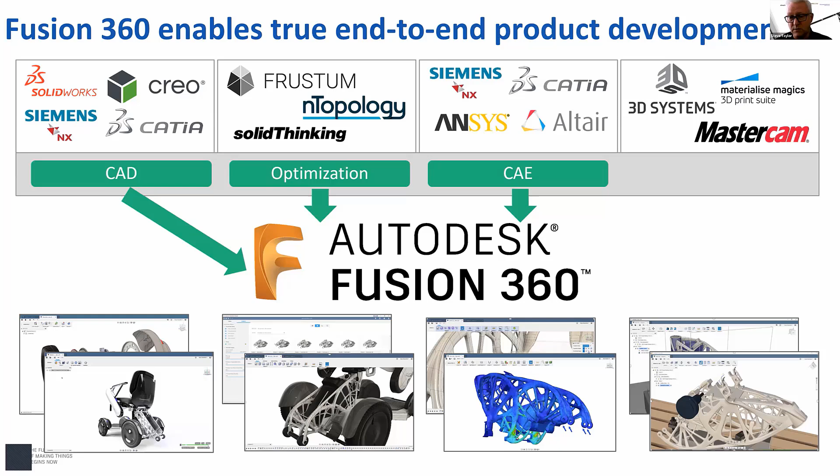With things now within Fusion, we've got generative design. We're actually able to let an AI in the cloud run iterations on a part, given what materials are available, what manufacturing is available, and what stresses and forces the part will be subjected to. The AI will come up with designs for you.

And finally, you've got the ability to see whether it is manufacturable without having to export it into a third-party software, test it, and say 'oh, actually, we can't machine that,' and then bring it back into the design. So that's all within one platform.

And even more, this is semi-cloud-based. So even though you're working on the software on your computer, you're able to save all your data in the cloud securely. That makes it better for data management and for collaboration, as you can have multiple users invited to projects to collaborate, comment, and work with the designs collaboratively - and it doesn't matter where you are.

Another beautiful thing about it is that you're able to view your designs on your smartphone, on your iPhone, on your iPad. If you're an educator or in education, you've even got the ability to have a fully cloud-based version, or access to a virtual server, meaning you can use Fusion completely in the cloud - whether you've got a Chromebook or an iPad, you've got the full capability of doing that.

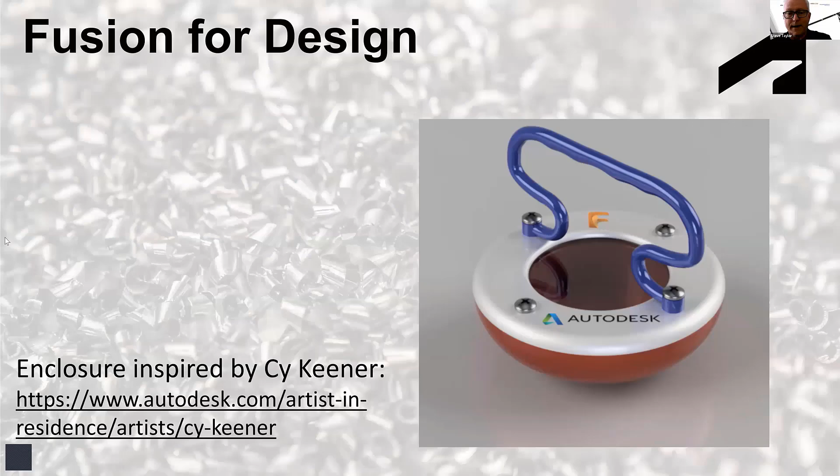So let's have a look at Fusion in practice. One of the things I want to do first is look at the design side of it - how quickly can we iterate and design in Fusion? Rather than doing a PowerPoint, I find sometimes the easiest thing to do is just jump straight into the software. So this is Fusion itself.

Up on the top left-hand side, we've got 9 little dots - sorry, the show data panel. If I open up that data panel, this gives me access to my cloud library. If you're used to using cloud, whether through Windows, Microsoft Cloud, or Google Cloud, it's very similar with the Autodesk Fusion Cloud. All your files, all these particular products are up in the cloud, and you have access to them wherever you may be in the world.

You can easily create projects. So I open up a project and I call this 'knowledge point.'

Call it 2 - you've already got one called 1. That creates a webinar or project in alphabetical order, which I can pin to the top, allowing me to have quick access to any of my particular projects that I'm currently working on.

When I go into it, I'm now able to create folders and file structures, and upload files. It does have one-tab uploading - if you upload a CAD file from another company created on different software, Fusion will try to create a Fusion file from that straight away. So when you open it up, it will be a native Fusion file. It's called AnyCAD.

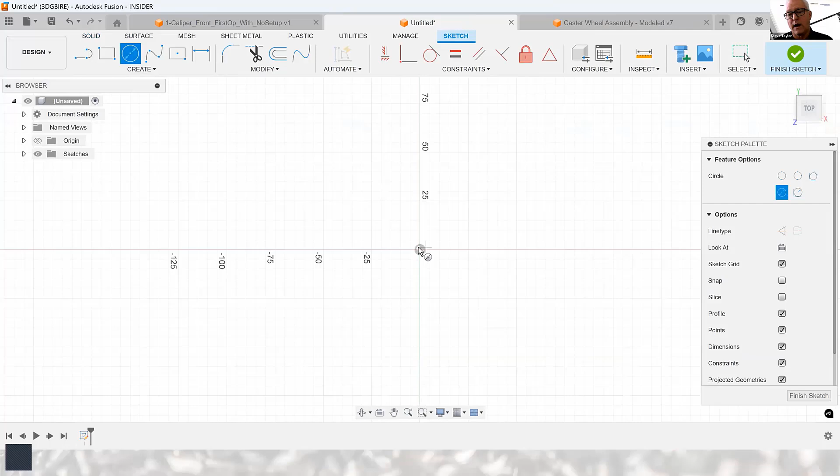I get separate sketch tools that I can create, and I can provide certain sizes for the diameter of the sketch I'm producing. Once I've created my 2D sketch, I can go back into a 3D environment and very quickly extrude that to a certain thickness that I want.

As default, my material is set to steel. If this is the lens I'm creating for the top of my enclosure, I can very quickly just change the actual physical material of this part. This also works for when we're looking at stress calculations. All I have to do is drag and drop, and it converts the actual material for this part to whichever material I've dragged onto it.

If I close that now, all I'm going to do is just save this - I may as well keep it in the Knowledge Point Webinar 1 folder, and I'll call this lens.

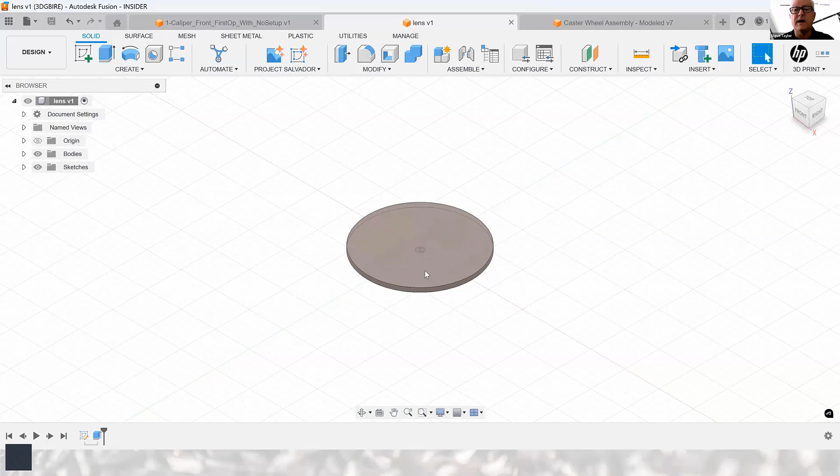That's just a simple process for creating an individual part. If I wanted to actually create an assembly, I don't have to do anything different from what I've just done. If I start a new design, I can have multiple designs open simultaneously. First of all, I'm going to create a component - the base part of my assembly.

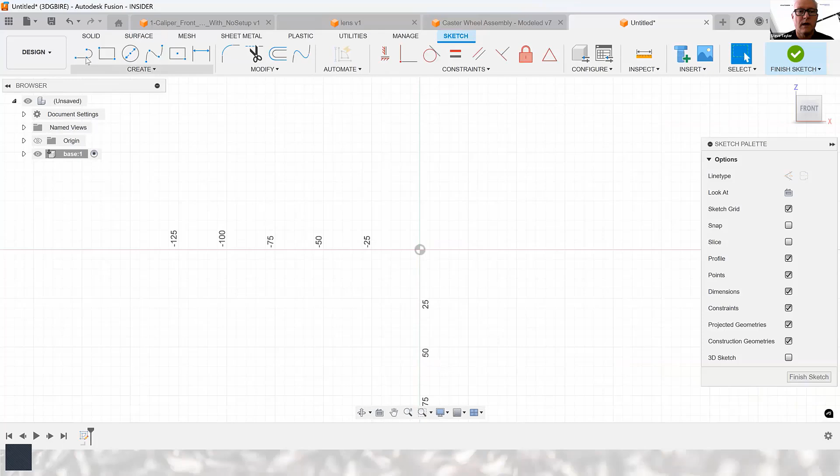I'm going to sketch on this side here, and roughly position the size of the profile I want to produce. I can use dimensions to actually fine tune the sizes of this.

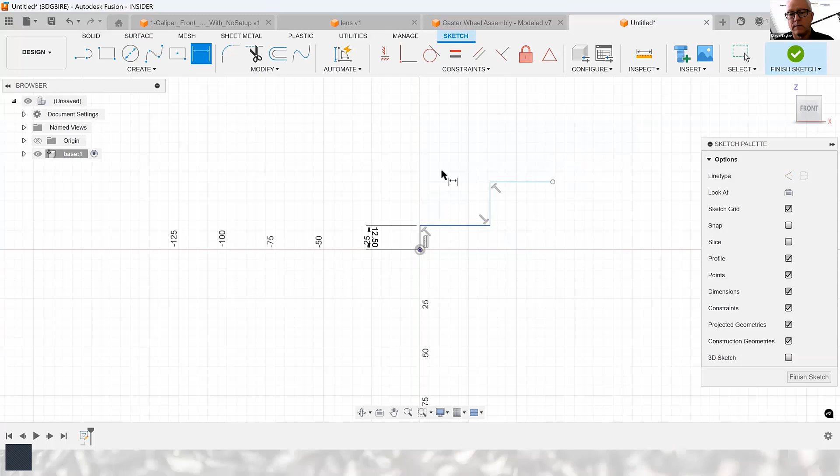Make that 32, make that 35 to the top. You can see I'm very quickly just adding dimensions, and I'm doing it pretty quickly because I'm conscious of the time we have for this particular webinar.

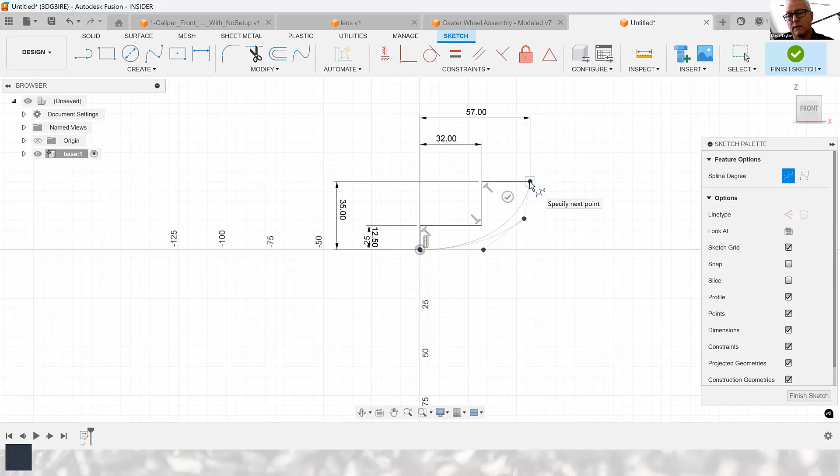And then in the spline tool, I'm going to do a control point spline, which will allow me to very quickly create a spline. With this particular type, the actual shape of the object is controlled by where these points reside.

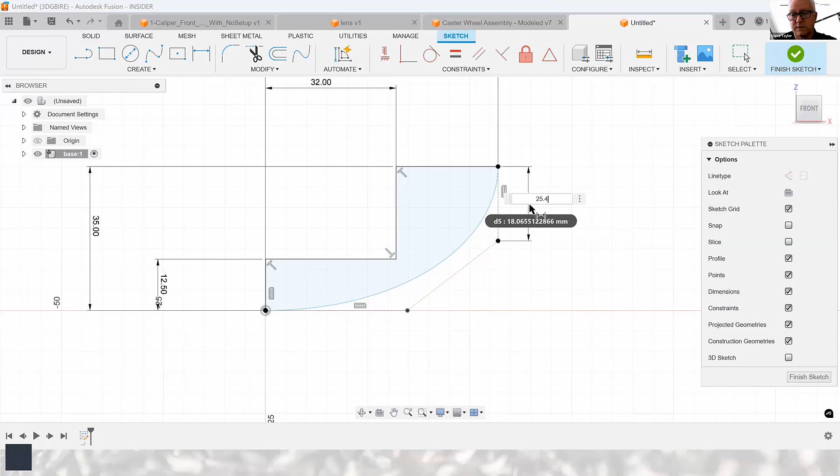So what I'm going to do is just fine tune from here - fine tune so that's horizontal, that's vertical - and then by giving a couple of dimensions here, got that at 25.4, and also make that exactly the same as that one. So again, parametrically driven sizes to produce these for us.

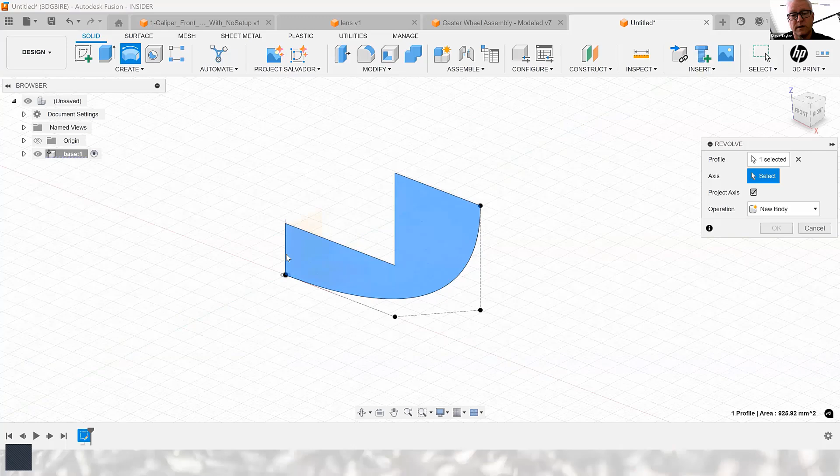Once I've finished that particular sketch, I can then revolve that round, selecting the center line, or the axis that I'm going to be revolving it around, which in this instance will be this line here, and I can create a body.

If I want to put some holes in, very quickly, I can sketch on the top here. I can place a point where I want a hole, much like you might do a center pot when actually drilling a hole. I can very quickly make sure that point is aligned to the center, and then using dimension, I can very quickly put a dimension in here, 44.5. Finish sketch. This then allows me to use the hole tool.

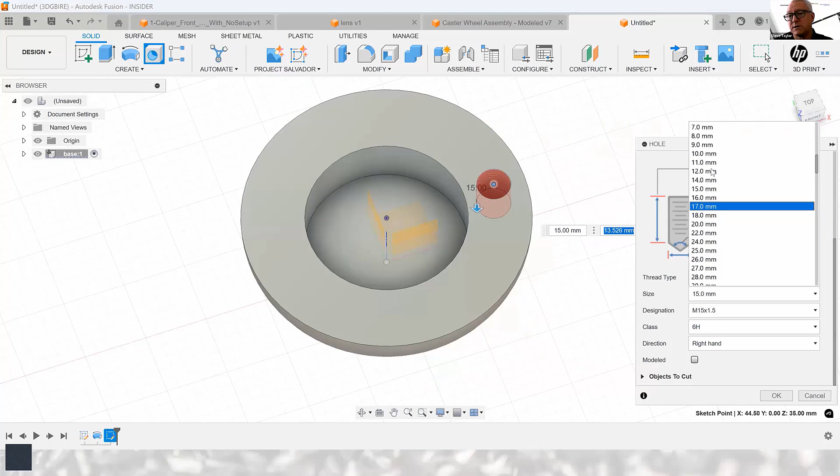And if I select that point now, I can very quickly specify a type of hole. I can make it threaded. So if I wanted, say, actually I want this to be a 5mm thread, maybe not bigger, let's make it 6 — change that to 6 there. I can give it a depth, let's get that 12. And it's just a simple hole that we're putting.

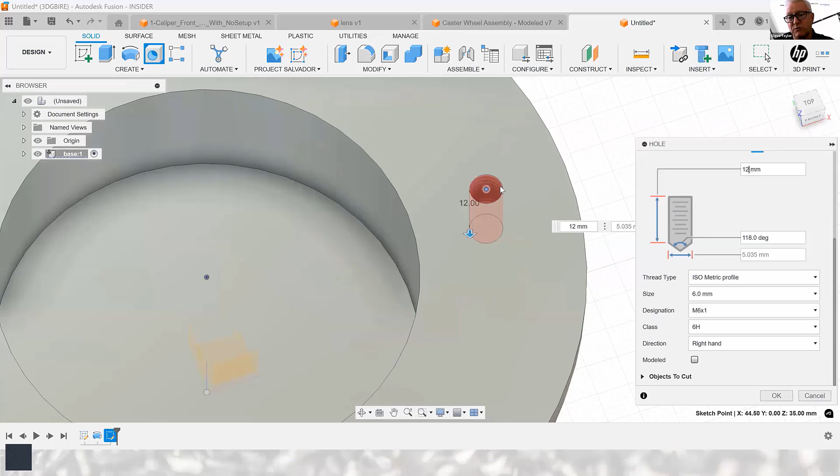Now, this is just a raster file, just a raster image. If I want to actually physically model it for 3D printing, I'll just put a little tick in this box here, this little box down here. And then what that will do is actually physically model the thread.

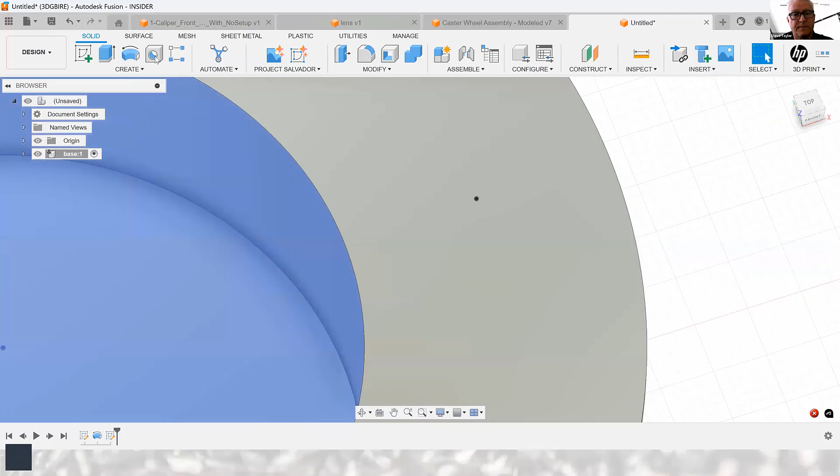Now, because I actually went into a zoom function then, it removed the selection point. If I go there, let's change that to tapped again. I said it was 6 mil, and let's put 12 mil on model. So that's now created that particular tapped hole.

I can use then a circular pattern to actually pick up on the timeline at the bottom that particular feature that I've just created, and then spin that around, saying that I want 4 of them.

Now with timeline modeling down here, if I want to do any changes — say I didn't want this to be an actual physical thread, but just an image — I can go back in and just remove that model, press OK, and it will automatically update moving forward. So this now is just a raster image rather than the physical model.

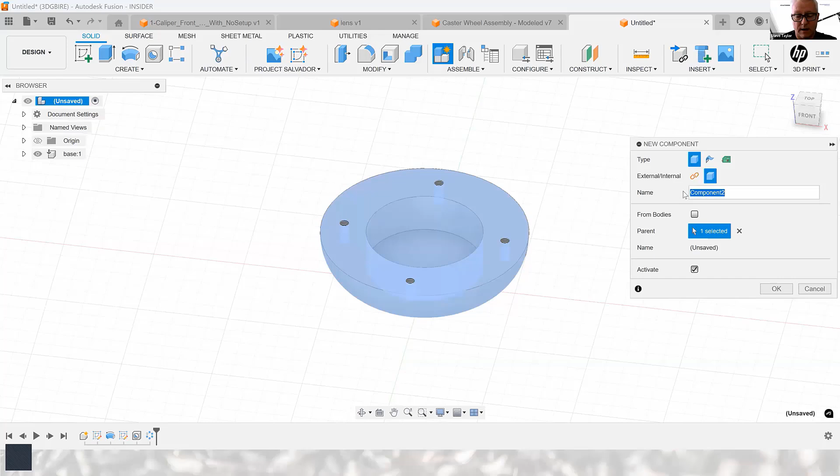With the base now completed, what we're able to do, in modeling or design terminology, is top-down assemblies, because I'm able to go back up to my top level, create a new component — this time I'll call it the lid — press OK. We now have a new component called lid in the browser on the left-hand side, and I'm able to sketch in place the lid where it needs to be.

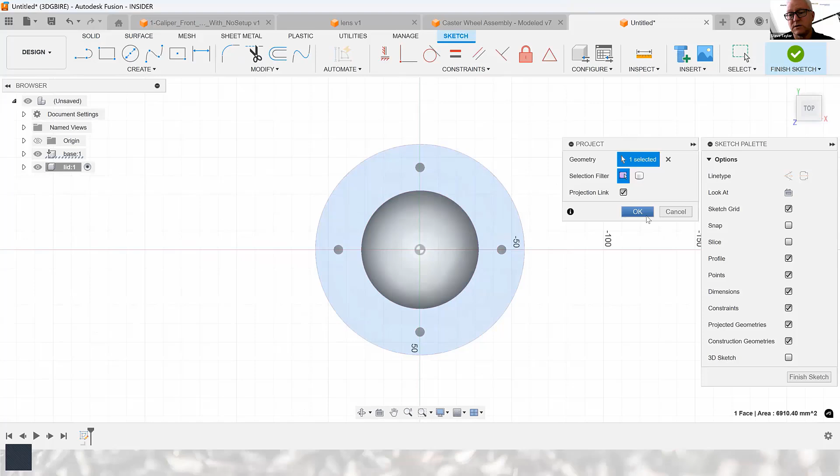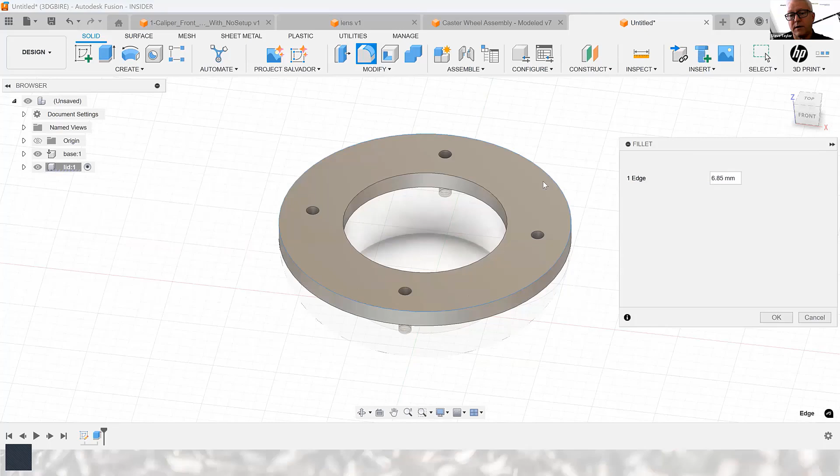If I now project through some of the information previously, it picks up on that. I can finish sketch, and I can actually extrude our lid upwards. If I call it 6.85 there, we've now got our lid in place. I can then come in, add a couple of fillets — put 6.85 on that one, and then add another one on the inside of 3 millimeters.

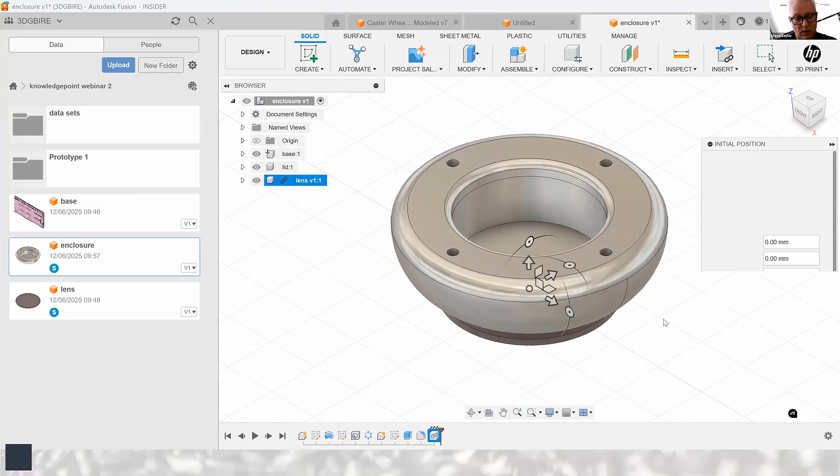So what I'm going to do very quickly here is bring in that lens that I created earlier. If I go to our data panel at the side, it'll open up. So we've got our enclosure that I've just created, and we have our lens that I created earlier. Now what I'm going to do is just drag and drop my lens into the environment here, and you'll notice it comes in at the bottom area — that's actually come in where I originally designed it, on those coordinates. I'm just going to pull that out and go OK. So that brings this lens in.

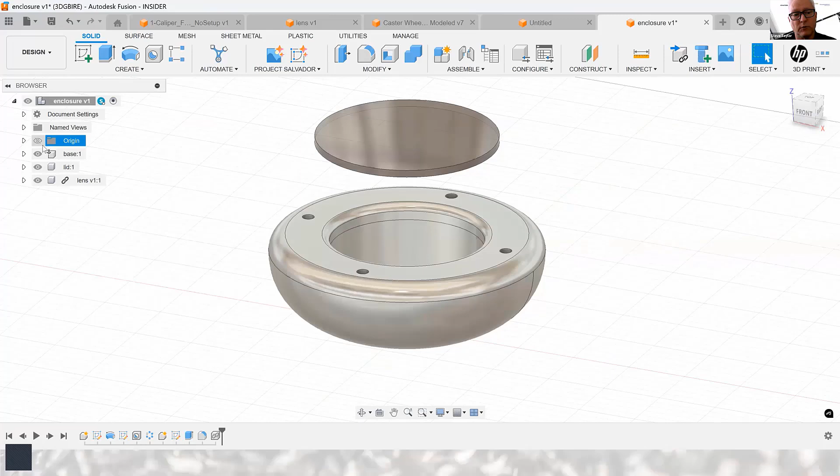And with all of the components that we've got here that we've modeled, we've got the ability to turn off the visibility of them and turn them back on again. So that means I'm now able to potentially start joining these together using what we call joints.

In Fusion, we have a number of different joint types - we've got as-built joint and joint. As-built joint allows you to join components where you've actually physically located them.

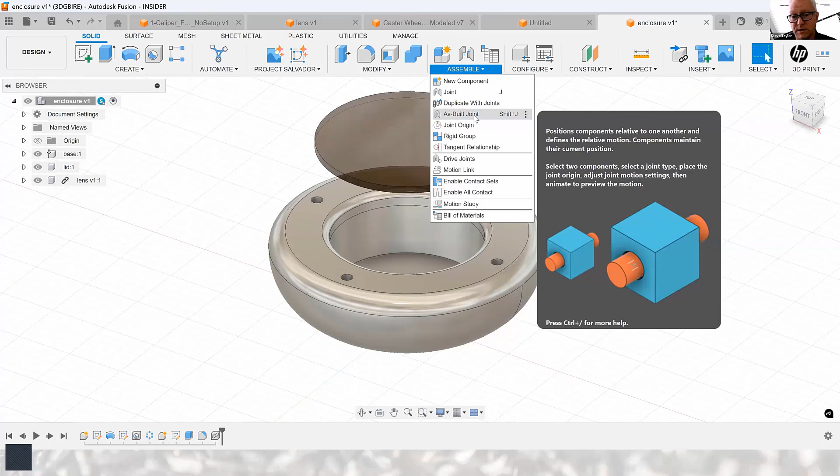Because I've created my lid in the correct position, if I do an as-built joint, select the lid and then select the base itself, I have the option of the type of joint. It will be rigid, but just to show you, if I go to Revolute and select the center, you'll see that it puts in this joint - it opens up a revolution joint. But I don't want that. For this, it's purely a rigid joint. Press OK, and that allows us to physically fix this in position.

If I hide the base, I can now use the joint tool to join the bottom of my lens into the bottom of my lid there.

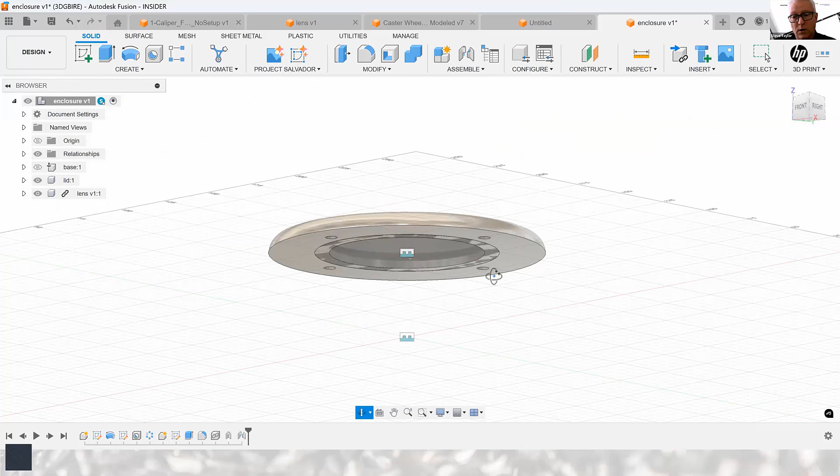You will notice that we've got interference. I can inspect parts, so I can say inspect these two for interference, and it shows me here that I've got areas of interference. Now that could be a problem.

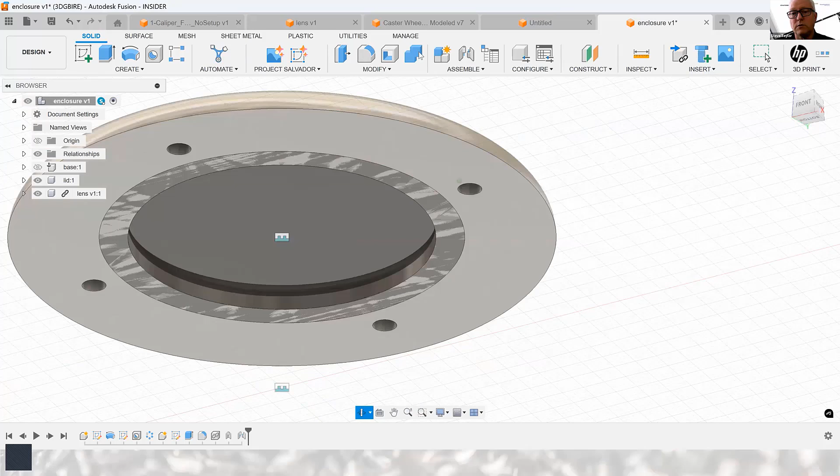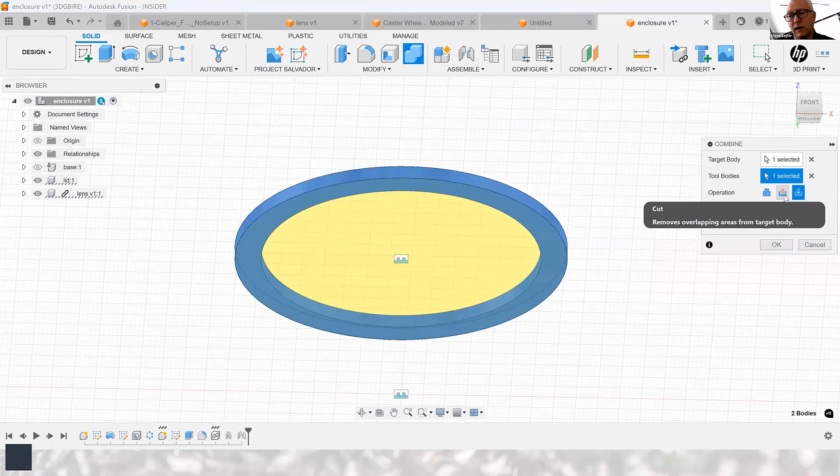However, in Fusion, it's not, because we can use this combine tool. What the combine tool does is allow me to select the target body to edit, which is this one. I can select a tool, and I've got options now - do I join them together, do I just do the intersection between the two, or do I actually use the glass to cut the lid? That's what I want. Press OK.

And now we've actually got a cutout where our lens was. And if we want to add just a little bit of clearance, I can press pull on here and just pull it outwards a little bit, to a quarter of a millimeter. Press OK, turn the lens back on again - that's now got its clearance, so it will fit.

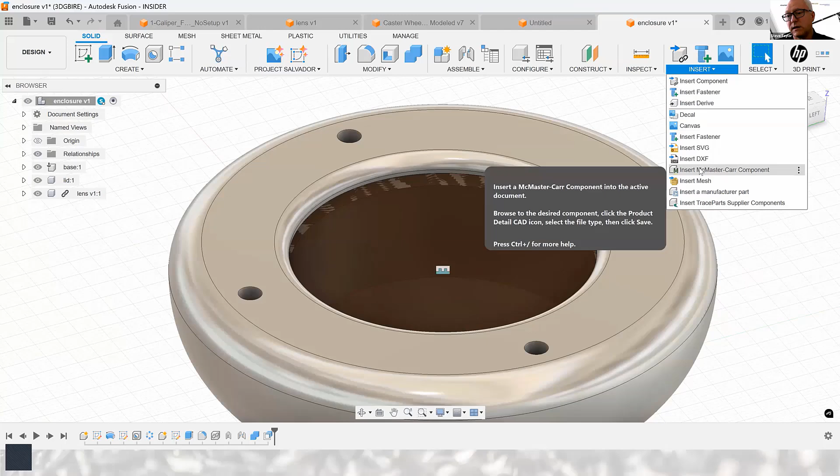That's the base there, and we've got our assembler. I can bring nuts and bolts in, so I can insert components from what we call a McMaster-Carr component catalog - I've got screws, nuts and bolts that I can bring in to use in these designs.

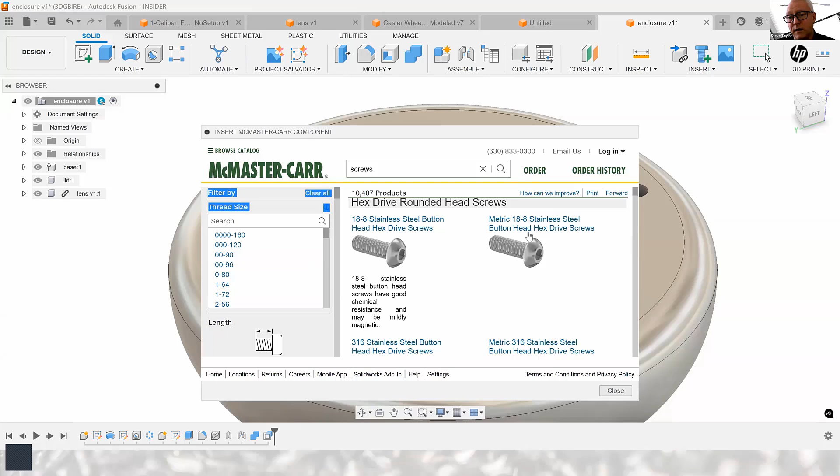I can search by various thread types. I can look for metric, I can look for round head screws here, I can find various metric options. Pick the one, and if I find one that I think will do, if I select the product, I can actually go straight in and download the step file for it.

If I download that... download, hopefully it exists in there. Try the sat file and download. That would actually download it, but for some reason that one was just not quick enough, so I might try a different stock component there. It's pretty small anyway.

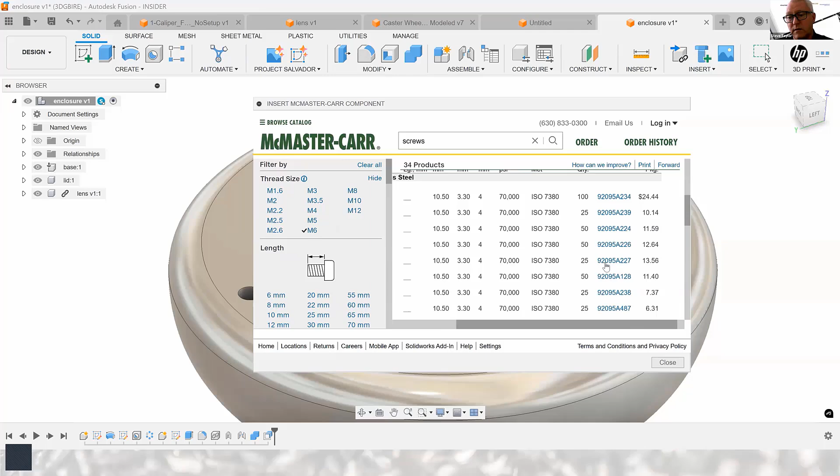I actually want an M6 - no, let's go M6, probably 14mm long, 16mm long. That one, step file, download. There we go - so that now brings in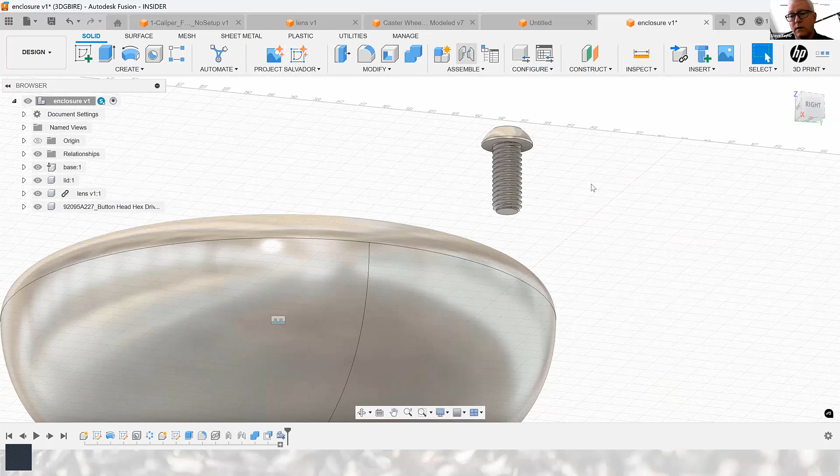a screw that I'm able to then join in the hole that I want.

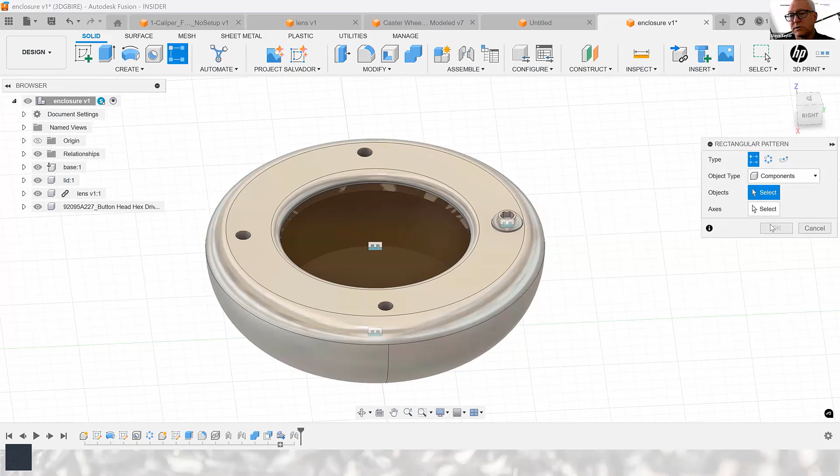Now, I can do the handle and then add more screws, but just to show you what you can do, if I do pattern of components, I select the component, which is the screw, I select the axis - anything on that axis there - and we want four of them. We want four, and we've got them in position.

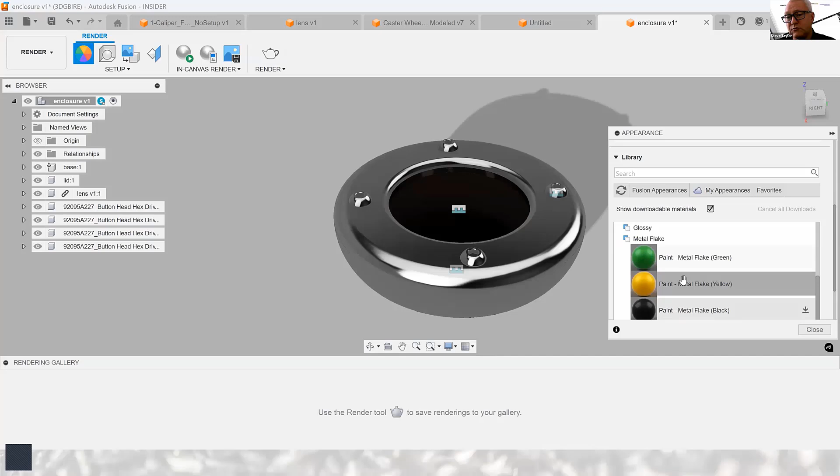Now I carry on with this, but what I'm going to do is go into the render. So if we want a good image of this, as you can see, it's in stainless at the moment. What I have the options to do is change the appearance - so if this is going to be potentially painted with metallic metal flake paint, I'm able to drag and drop onto various parts of metal paint.

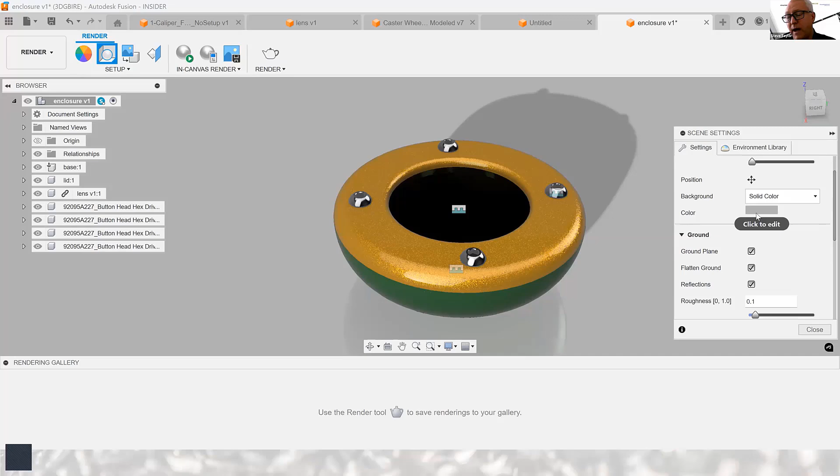I'm able to add or play with the scene settings, so I can increase the brightness of the actual scene that's being done. I can put a flat ground plane in, play with the reflections. I can change the background color or even the lighting - so I can just drop in this environment here and change the types of light, and just turn up the reflections.

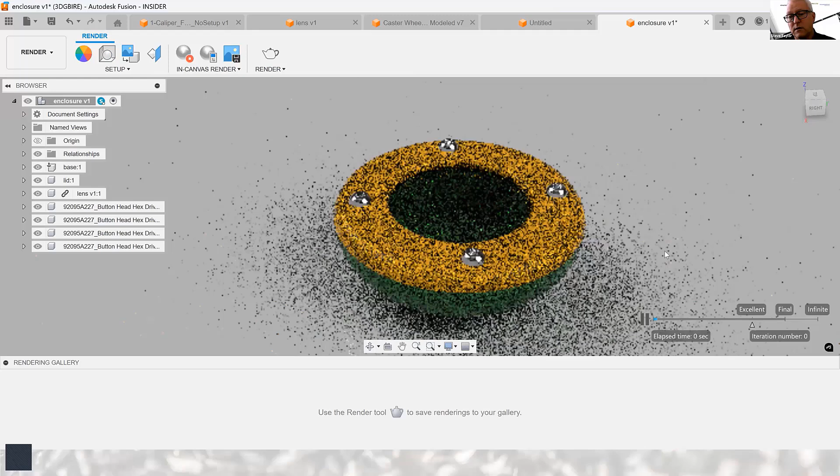Whilst I'm doing this, at any point in time, I can just run what we call an in-canvas render, which will give me an indication of the physical rendering that it might look like when it's actually done.

So, and I can zoom in and it'll start again. But this uses your computer's computational power, and you can't do anything else.

But with Fusion being semi-cloud based, what I can do, if I'm happy with this, I can go straight into render and do a cloud rendering. Click render, it will save the document, and I'm going to have a gallery appear. Now this is rendering in the cloud, which means I don't need to do anything else with it. I can come back in 5 minutes and I'll have a good rendered image.

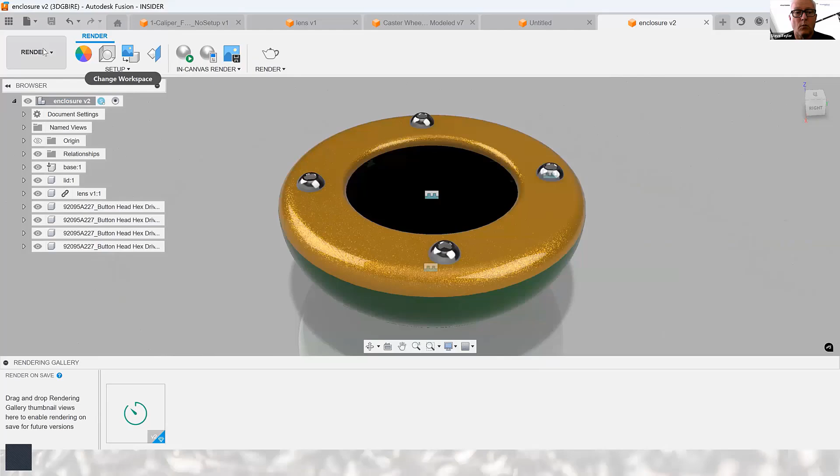What I can also do from this is an animation. So if I've got a big animation, or I want to animate and show people how this all fits together, this is the animation side of Fusion. We have a timeline at the bottom. Currently, the initial timeline is set to 1 second, and we've got a camera operation.

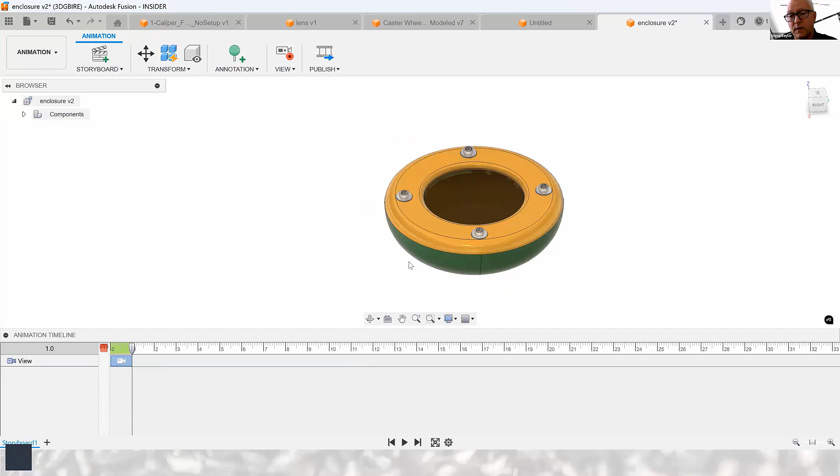So as I'm zooming here, it creates this. Let me drag the slider back. It creates that animation there. If I then change this to maybe 8 seconds, and I move this down and zoom out a little bit, I can also transform my components.

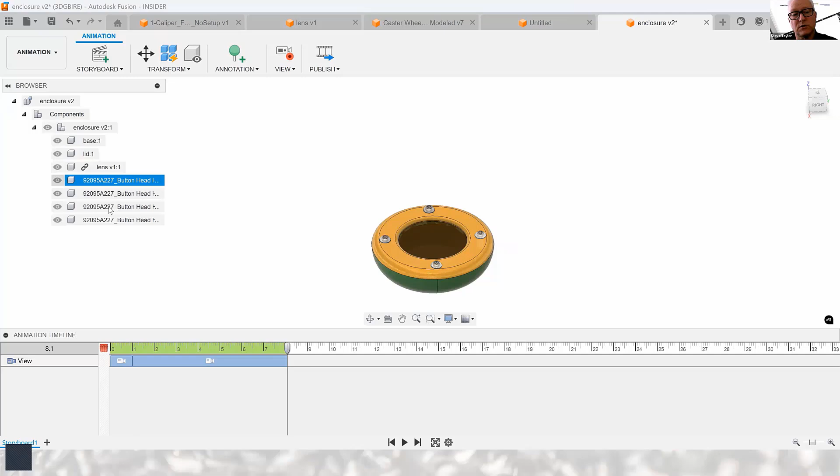So I can come in, I can go straight to each individual component here and move each of the components, potentially with a visibility trail, and move them all out. Now this visibility trail - very quickly I can create quite a complex animation on this.

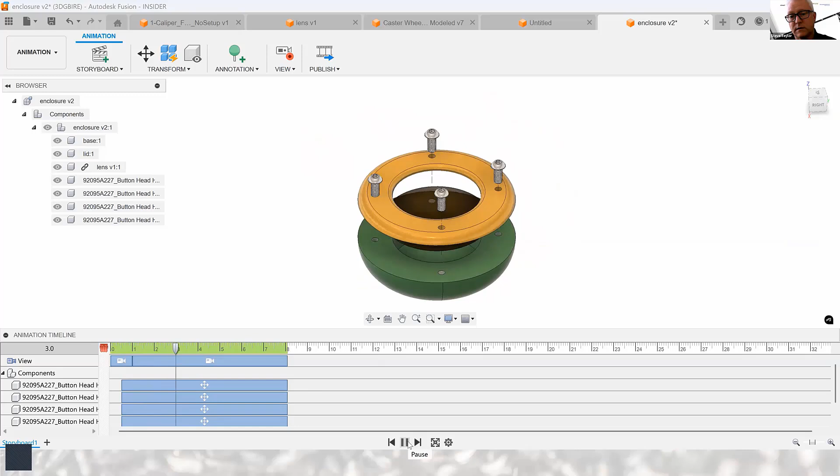Select the lid, move that up, select the base, move that down. Press OK on that. If I then drag this timer back, I very quickly created an animation of everything coming together. And each one of the movements I can modify and change.

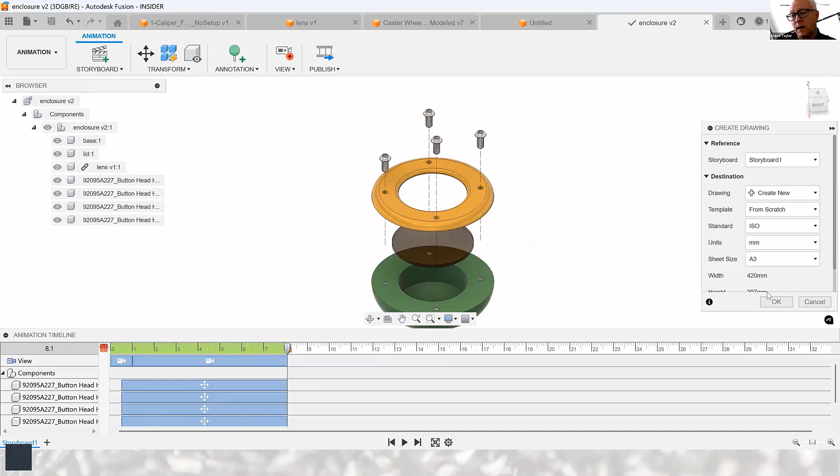What we're also able to do from that is create drawings, either from that original design or from the animation. If I do it from the animation, I'm just going to set it up as default. It auto selects the default size of sheet based on the actual design and the size of the drawing that we've created.

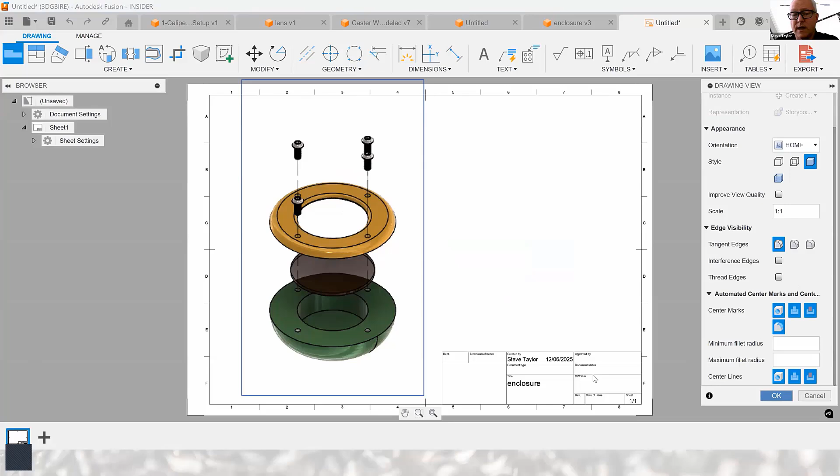And it creates an untitled sheet for us here. I can then drop in my base view. I can say if I want to have edges showing and center marks, center lines for everything, I can put all them on. Press OK. That creates that drawing for me.

And then straight away I can drag in a table, drop it onto the actual drawing, and it will automatically balloon it up. I could even bring in a base view of the actual assembly here, and from that I can potentially then just project other views.

Maybe I want that down to the bottom there. Do the side one here, open that, tick that, and I can just drag these up, and I can even add dimensions on. So again, very quickly I can create multiple drawings simultaneously within one environment.

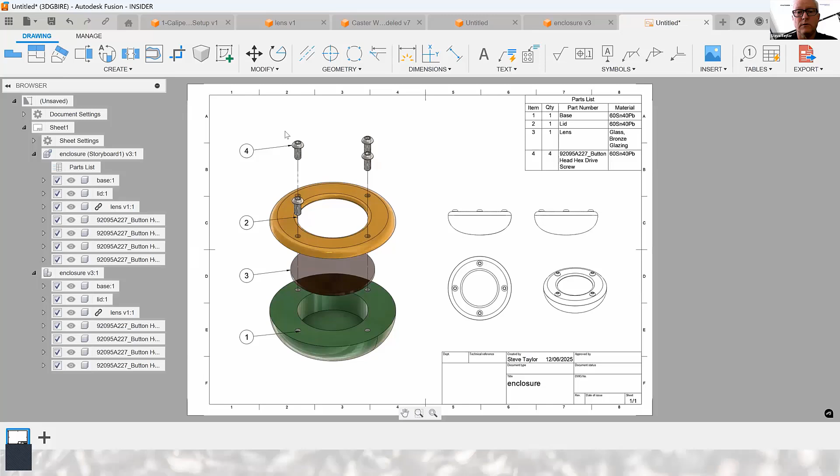So that's very much a quick overview of the CAD side. What we've also got in Fusion is a CAM side, so we're able to very quickly run CAM profiles through our design. Again, just quickly going back into Fusion, I've loaded up this particular part here.

And all I'm going to do is just demonstrate very quickly. You can see within the manufacturing environments we've got milling, turning, additive, inspection and fabrication possibilities. I'm just going to stick with milling in this. We have 2D capabilities, 3D capabilities, and multi-axis, so we can do up to 5-axis manufacturing.

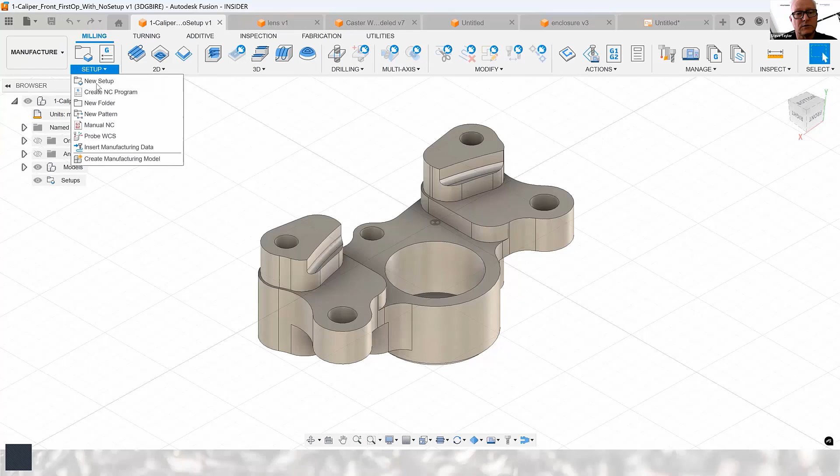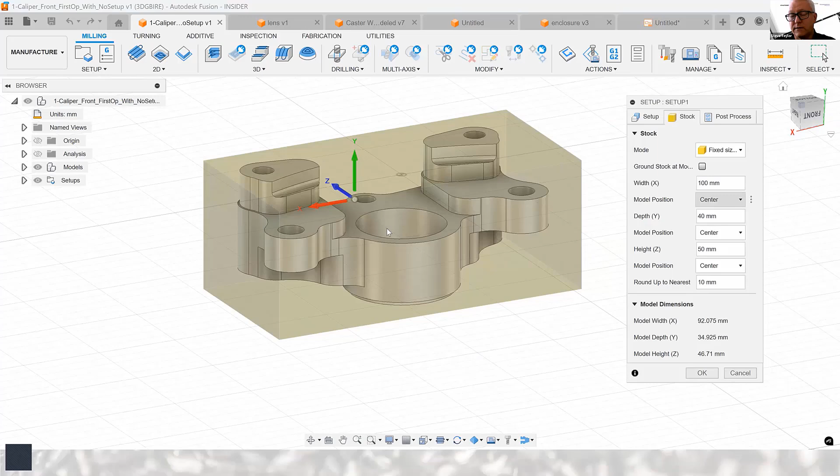Just going to create a new setup. From this, as default, it comes up with a default relative size block, which you can actually change. So if I said that it is a fixed size block, it'll change to a fixed size. I can then position where I want my model within the block.

So looking at this now, I'm just going to round it down there, and I'm going to change these sizes now. So I'm going to pick a size of stock that I can potentially get off the shelf here, and the Z height there, that's about 50. But rather than having the model being central from a height perspective, I can actually offset it just from the top, maybe 0.5 millimeter there.

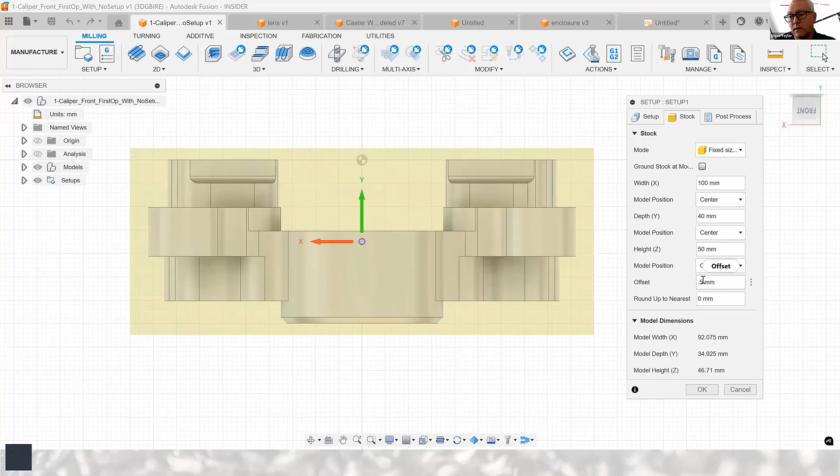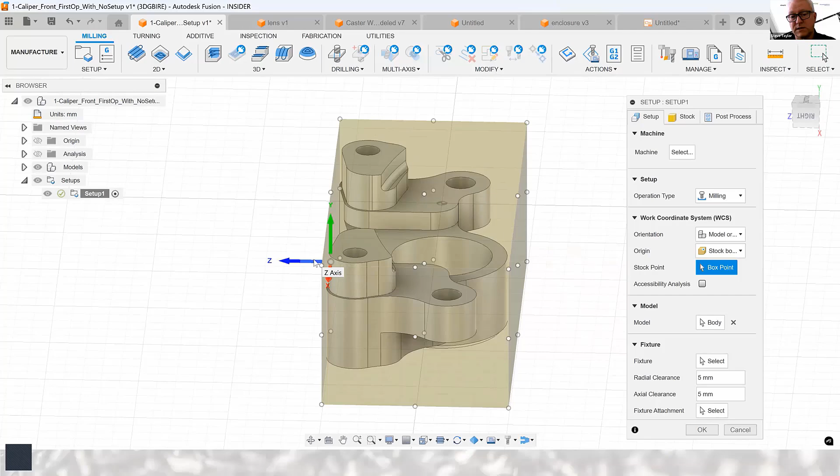So what that does is offset from the top by 0.5 millimeter, which brings that down in there. Now I can also position exactly where my Z-axis is. So currently my milling machine's Z-axis is going up - if I pick the stem of that and that face, it will position it this way. Because I've now relocated this, I just need to change the center of the stock in the X, Y, and Z. Let's change that now - that's perfect.

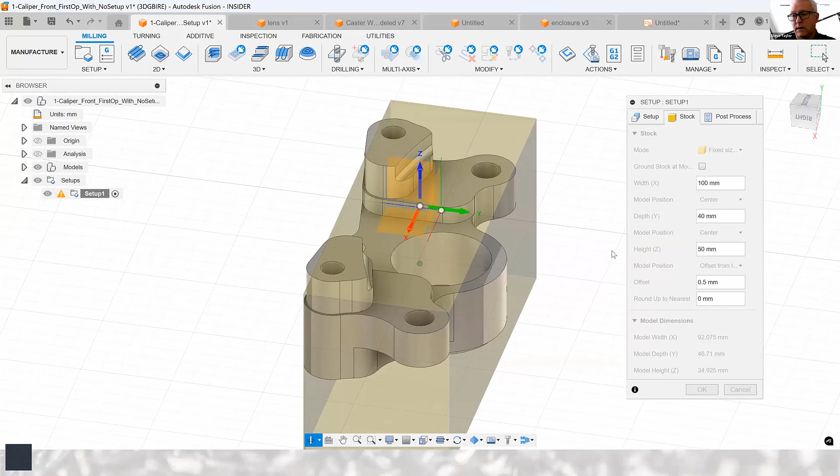I just need potentially to make it wider in my Y, so let's make that 50. Height wise, I can probably get 2 millimeters on there, so let's say I'm down to 45 - even 40, I think I might get a little bit of 40 on that. So very quickly, you can see how you can adjust and iterate the sizes that you've got.

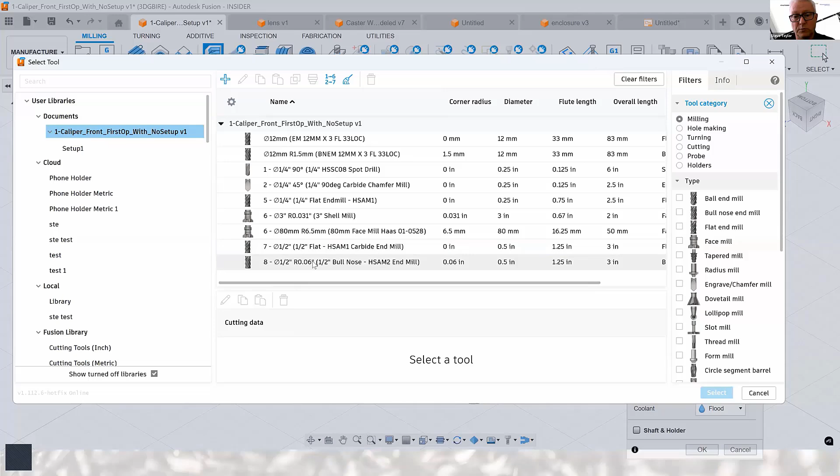Press OK, and then straight away I can come in and do a 3D adaptive clearing on this - selected the tool that I want, there we go. So let's say we're going to use, I don't know, a 1/2 inch, let's do a bull nose mill. Select. I'm going to just pull this out so you can see the names of these.

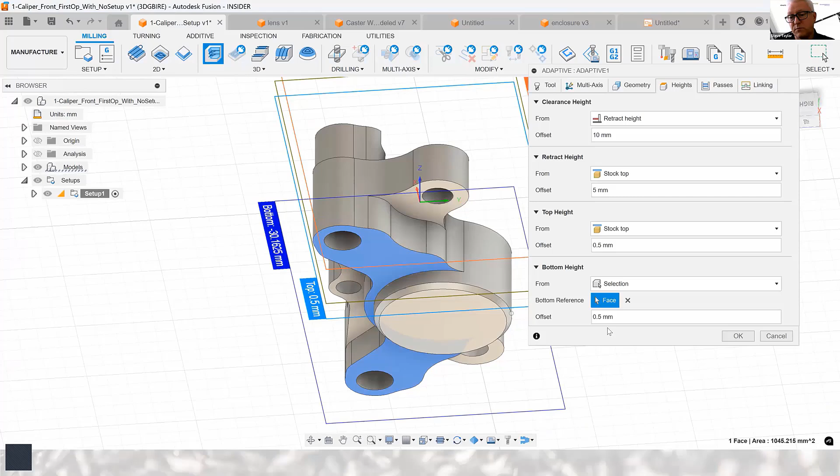With an adaptive clearing, I don't need to pick any geometry because it's just going to select all. I can do some containment, so I can actually say I don't want to go all the way down to the bottom - I just want to machine to potentially this height here of the base, but potentially go past it by 0.5 millimeter. I could work with passes. You can see there's lots - just like if you're using any other 3D manufacture software, you've got all the options within Fusion to really work with speeds, the types of tools, etc.

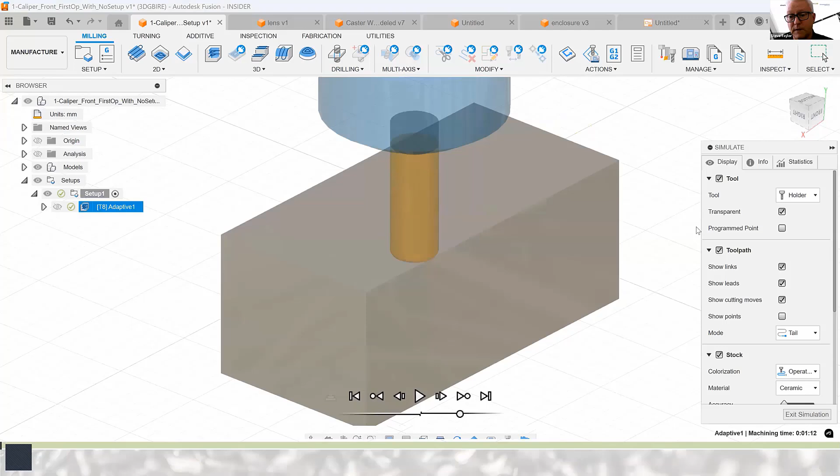If I go OK on that, this will actually produce my toolpath to create this. I think the tool might be a little bit big for it, but this is just for demonstration purposes. I can also simulate to see how potentially this tool might be used to actually rough out my part there.

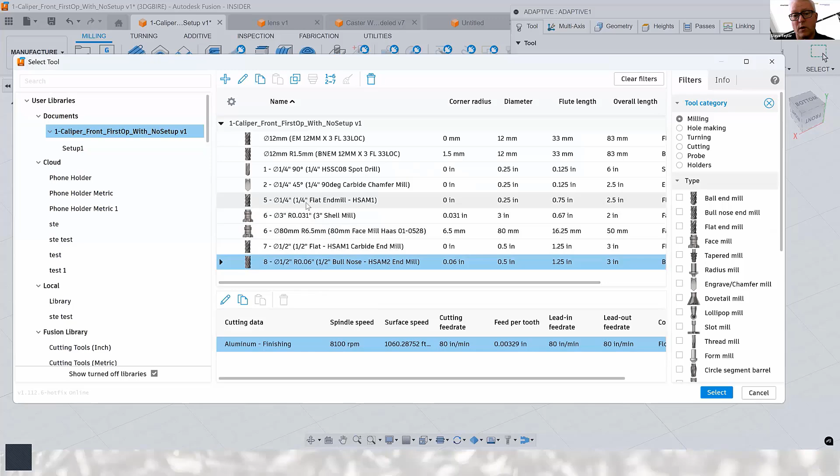And the beauty about any of this, if I decide that I need to change, I can go in and edit, I can potentially change the tool. So if I then change that down to a different one - rather than being a 1/2 inch, if I said well, I can only use a 1/4 inch mill in there - select. If I now go OK on that, you'll see that the optimal load is too much, it's saying it's trying to cut too much there. So if I come in here, I can change my optimal load, maybe down to 3 millimeter, press OK.

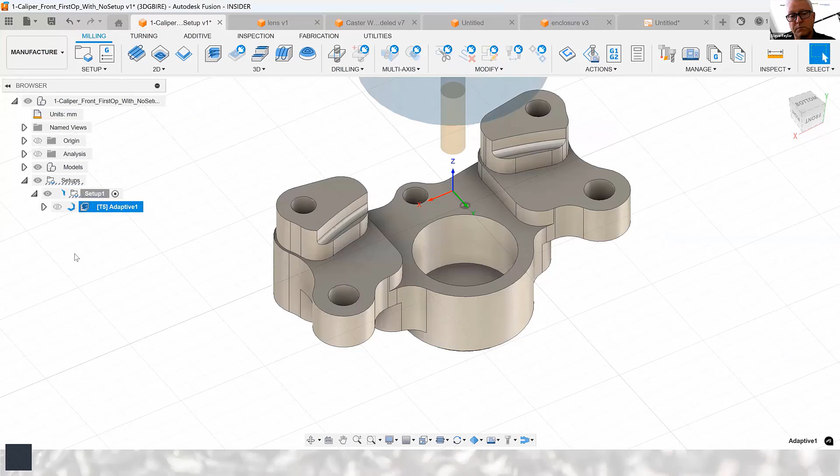And what we may find here - it's quickly working out, it's a much larger toolpath. It's actually machining down to that area there. And again if we go to simulate, there is a little bit of an issue up at the end. Now that will be potentially a collision with the stock, so really this is telling us that this tool is not really long enough.

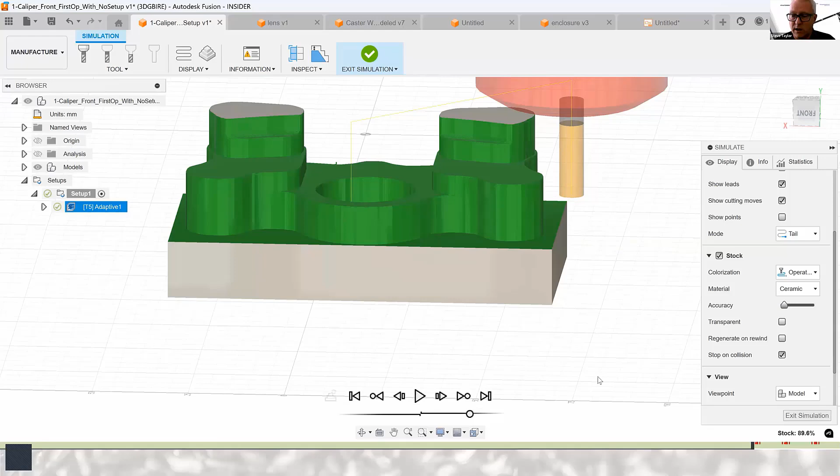And with stop on collision selected here, we can actually see - so if I now press the simulation and press play, I can speed it up and see how it's working its way down. And you can see straight away the tool is not long enough, so I need really a longer tool to work with this. So this is all shown within Fusion - it shows you where you fail and where you need to change, and it just works intuitively with you.

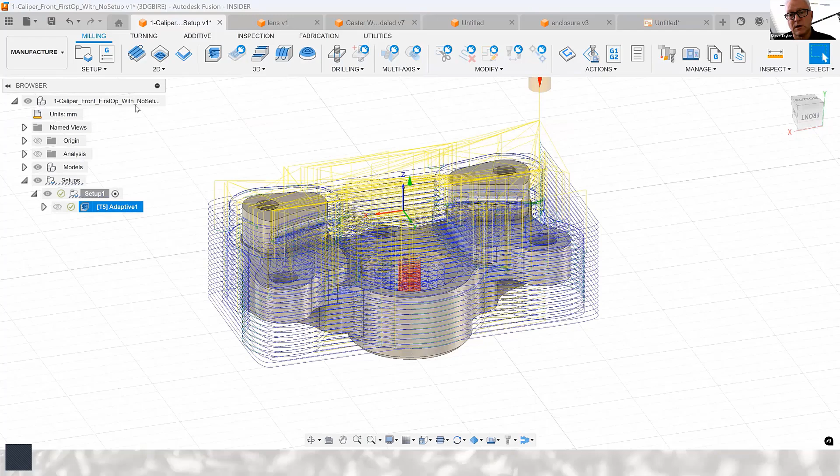Once you've actually got that potential program, you're then able to create setup sheets, which will potentially provide you with the - oops, came up on a different page, let me pull that across - a setup sheet for all your tools and operations. So as you build up a number of operations, you'll have your full list of tools there.

But also you're able to post it out to a G code, which again has popped up on the screen here. So I've got a certain output that I want - I don't know whether this is the right process for it, and it would again potentially produce that. If I can get this across - there we go, and that's produced the G code. Again, depending on the movement and the tools and the machine that you're using, it's just selecting the right code process at the moment.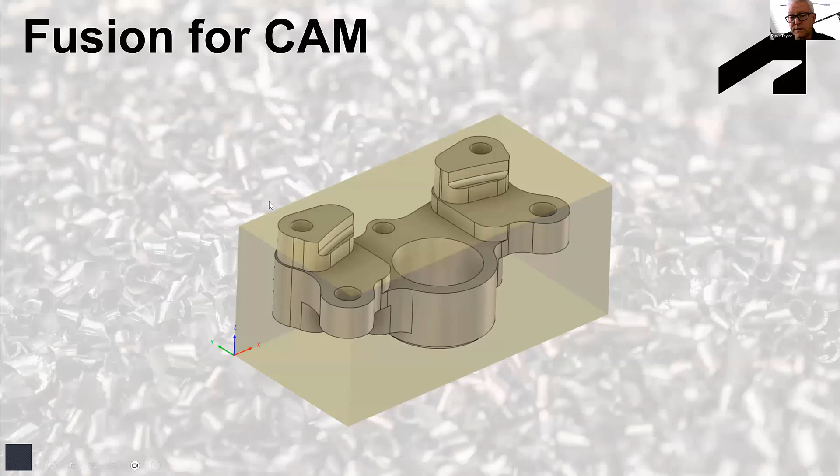Now, finally, one of the things I just wanted to touch on is generative design in Fusion. I know there's been a lot of talk about it, how it can help and work with you. Well, actually, what is generative design in Fusion?

It's design exploration. This is AI in the cloud that you can run. It's a bit like running a stress simulation study or a topology optimization, but it takes into account not just materials, but multiple different materials, the loadings, and the manufacturing technologies you've got available, whether it's 3-axis, 5-axis, 2.5-axis, or additive.

What it will do is plot out a table and give you success criteria as a result. As I said, it takes in manufacturing intelligence, so whether it's 2-axis, 2.5-axis, 3-axis, etc.

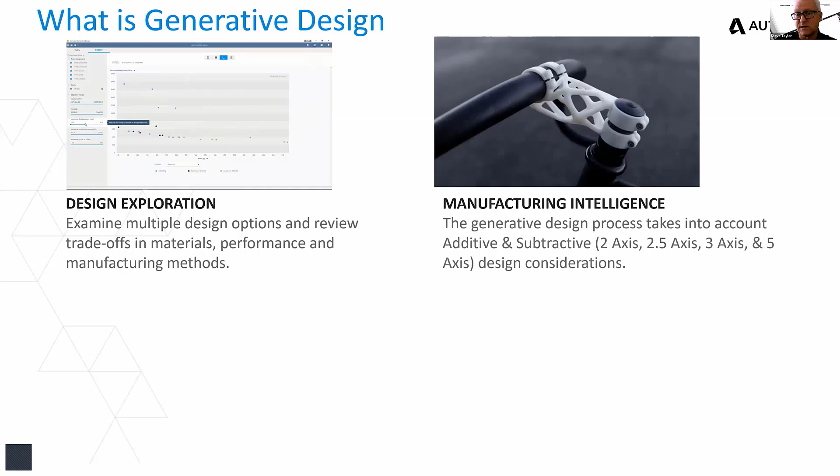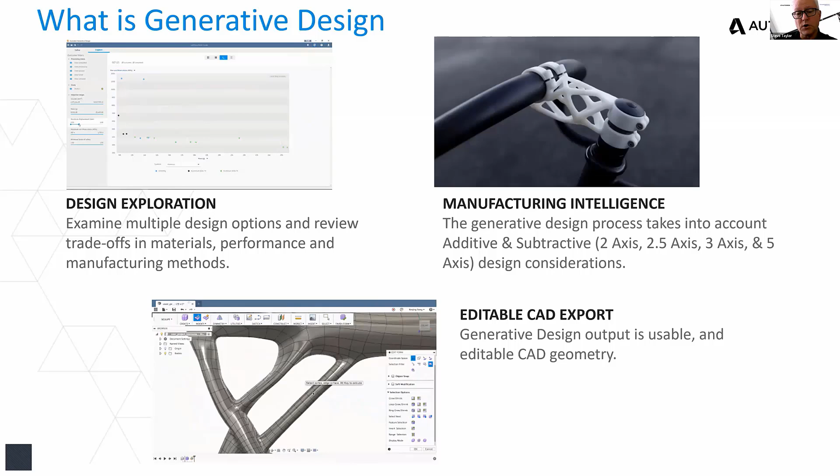And then from your result, not only can you get a mesh from that result or an STL from that result, you can actually get an editable model, something you can go in and fine tune.

Just as an example of that, let's use it now. In Fusion, this is just an example of some results that have potentially come out.

Each one of these results I can view, and we can actually see how, through iterations, the software has iterated and started removing material.

Now, this particular example that I've got here, if I finish looking at the outcomes, you can see down the side that I've got a number of generative models, a number of studies that have been done.

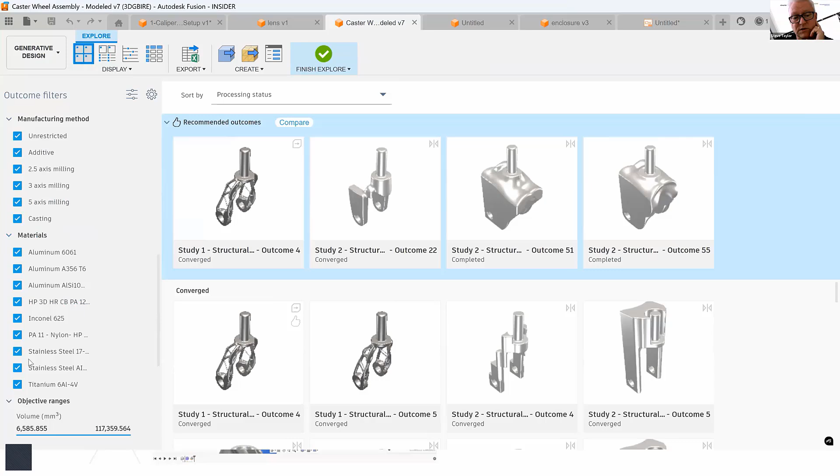We've got filters. So here, if we've got unrestricted, this will remove the unrestricted ones. If we've got additive, this will remove the additive type of technologies. Casting, the types of materials and studies that have been done.

We can look at it and view it in graphical form, looking at the minimum safety factor versus the actual mass here. We can change that and look at the mass.

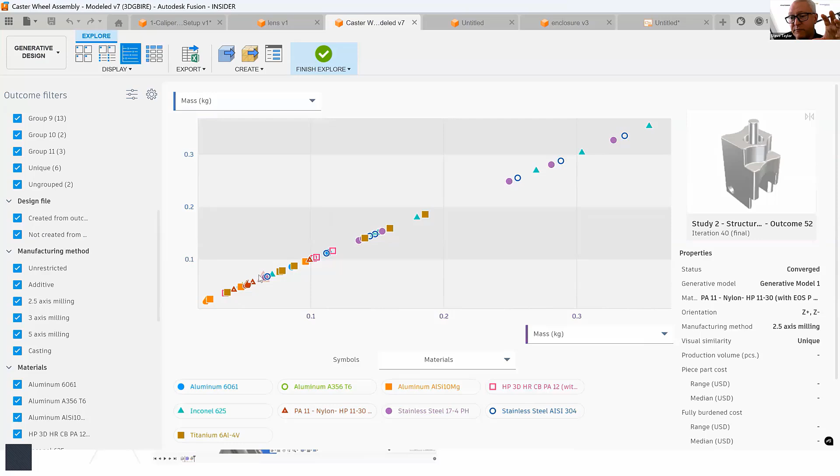Each one of these has a key. You can hover over it and see exactly which outcome refers to which particular type of material and type of manufacturing technique.

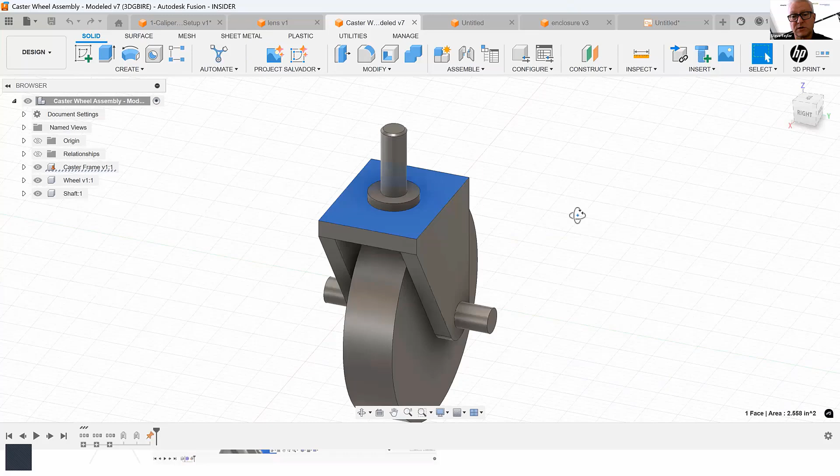To actually set up a study like this, you could start off with an initial design idea like this. The idea on the design is we are replacing this bracket for the caster wheel. So we need to keep this top bit because it inserts into the leg of a chair or table. We've got the wheel that we need to keep, and we also need to have a shaft through.

So through the generative design study process, we create something called obstacles and preserved geometry. The preserved geometry is the green - these need to be in our design.

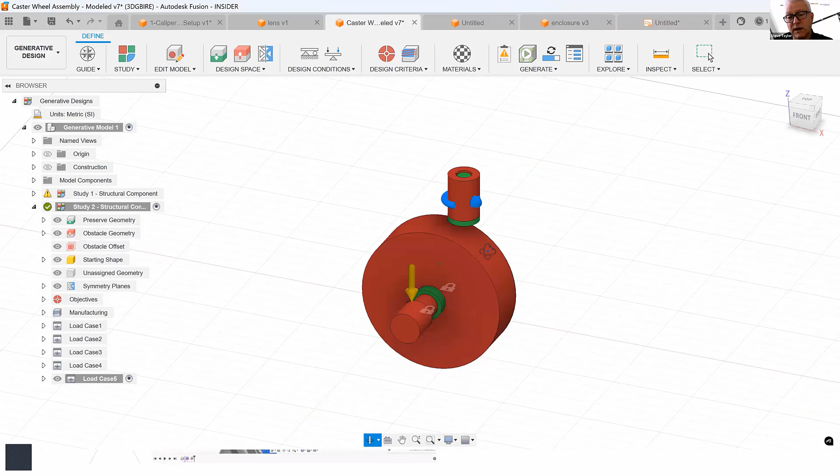Let me show you this. The green is what needs to be within our design, and the red is where we cannot have any material connecting. The software is going to try and connect these green preserved geometries together while avoiding the red geometries. From that, that's when we get these results.

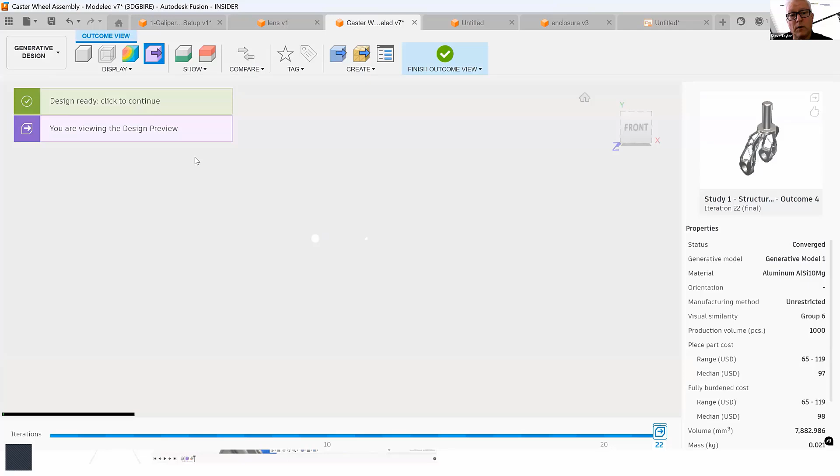And we can get downloadable models here. So we can click design ready to continue, open design. This will then open our design model in the software.

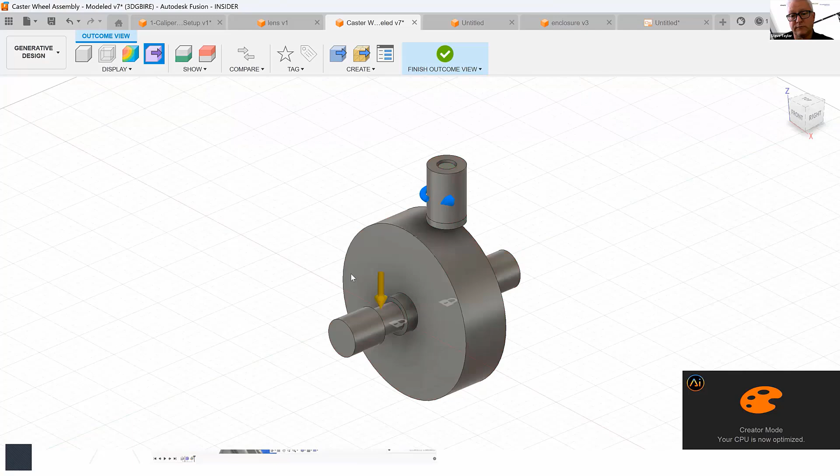And it is all editable. So if I go in the timeline now, find the organic form, which is this part, I'm able to use the soft modeling technique to pull out surfaces and modify parts of my design in any form or place.

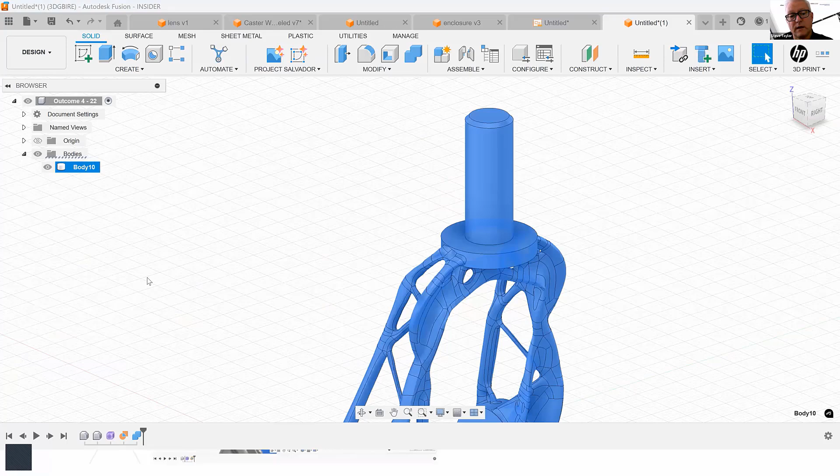Okay, and if I then want to 3D print this at the end, I'll get a file from it, an STL file. In my bodies, I've got body 10. I can just right click and save as mesh, so I can export it straight as a mesh and put it into my 3D printer, or go straight into the manufacturing environment and put it into the additive side.

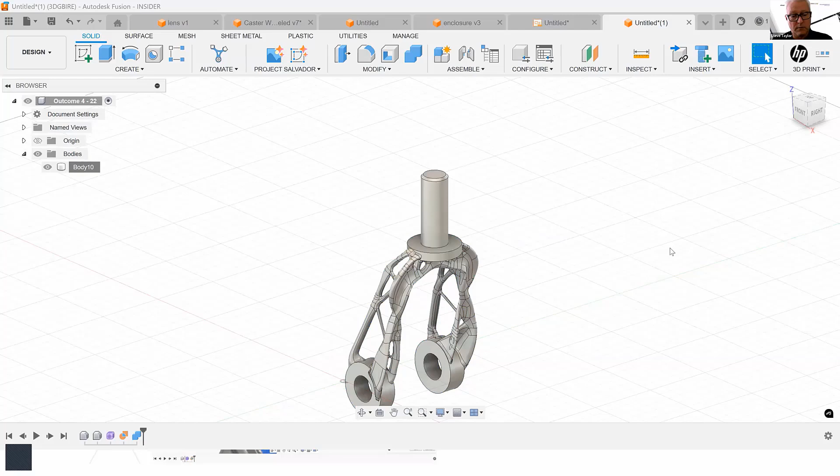So I know that was a whistle-stop tour of it, but that brings me, hopefully on time for Thomas, to the end of my little demonstration here. We hope this gave you a good sneak peek on what Fusion can do and an appetite for more, and we'd be happy to connect you with our learning partners.